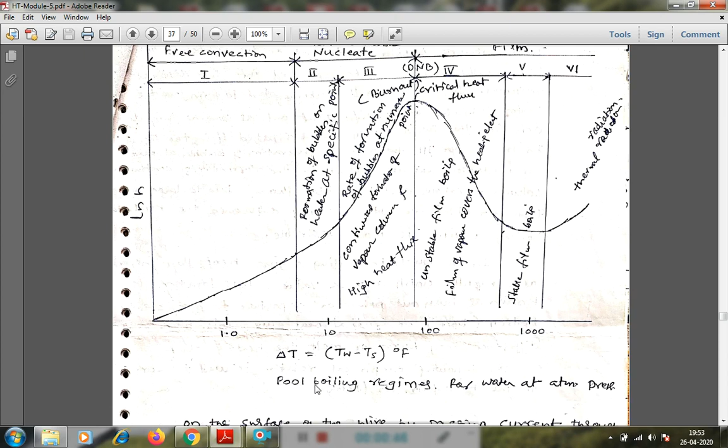These different stages of steam formation are called the regimes of pool boiling, or pool boiling regimes, under 1 atmospheric pressure. These regimes of pool boiling can be explained with a temperature difference versus heat transfer coefficient or heat flux curve.

Here the x-axis is the temperature difference between the wall and the steam, that is, the temperature of the steam formed and the wall temperature. Here the temperature difference is given in degree Fahrenheit, and here in degree Celsius.

Along the y-axis we have considered ln h, the logarithmic term of the heat transfer coefficient, and that is directly proportional to the heat flux also. This curve is drawn for an electrical heater coil immersed in liquid water.

Then continuous heating takes place, and heat is transferred from the coil to the water, and thereby the water temperature goes on increasing, and when it reaches the saturation temperature, vaporization takes place. We are going to discuss this vaporization in distinct zones here.

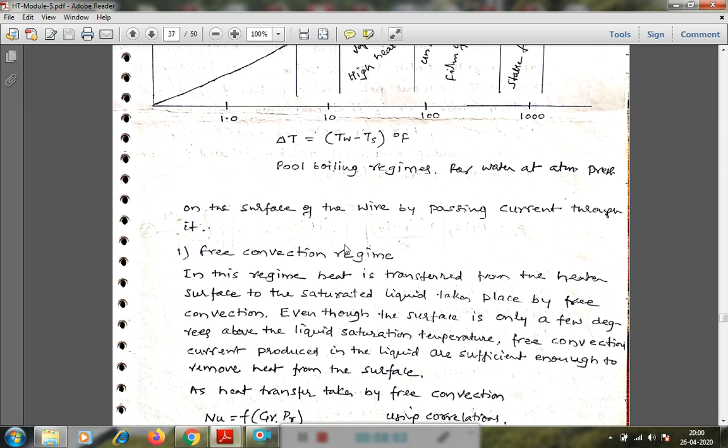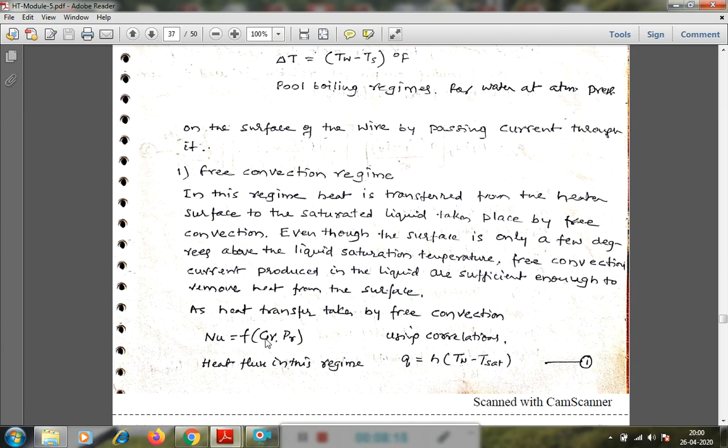Then in the free convection zone, what I discussed here, the heat transfer takes place by free convection. Here the heat flux can be given as h into (Tw minus T saturation). There we are going to use the Nusselt number as a function of the Grashof number and the Prandtl number. Then for nucleate boiling, we have already discussed the two stages, the second and third stage, and the DNB point and critical heat flux.

For this nucleate boiling, the heat flux is given by this equation: heat flux q is equal to mu L hfg [g (rho L minus rho V) / sigma] raised to 0.5, times [cpL delta T / (Csf hfg PrL raised to n)] cubed.

q is the heat flux, mu L is the viscosity, hfg is the latent heat of vaporization, g is the acceleration due to gravity, rho L is the density of the liquid, rho V is the density of the vapor, sigma is the surface tension of the liquid-vapor interface, and Csf depends upon the particular type of surface. I will show you this; it is available in the data handbook for the particular surface.

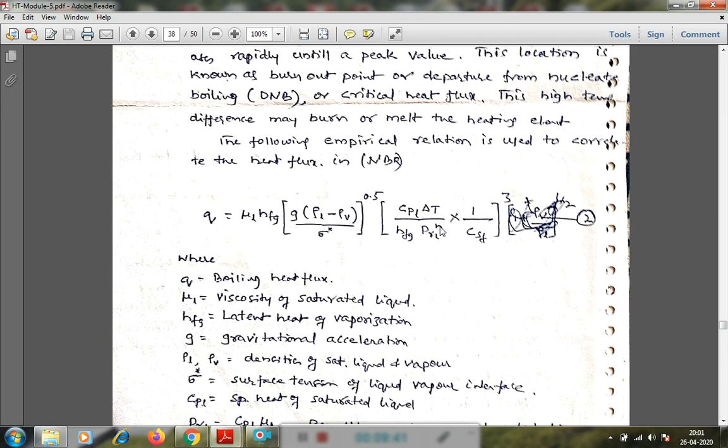CPL is the specific heat of the liquid, delta T is the temperature difference between the wall and its steam temperature, and HFG again is the latent heat of vaporization that we have taken, and PR is the Prandtl number of the liquid. This N is a constant: it is 1 for the water, 1.7 for all other liquids.

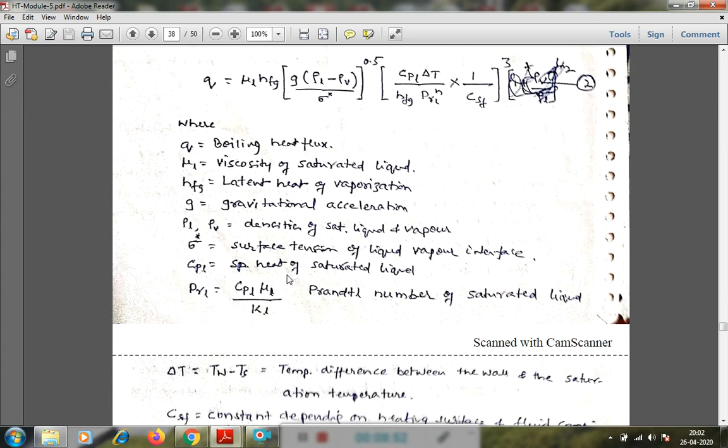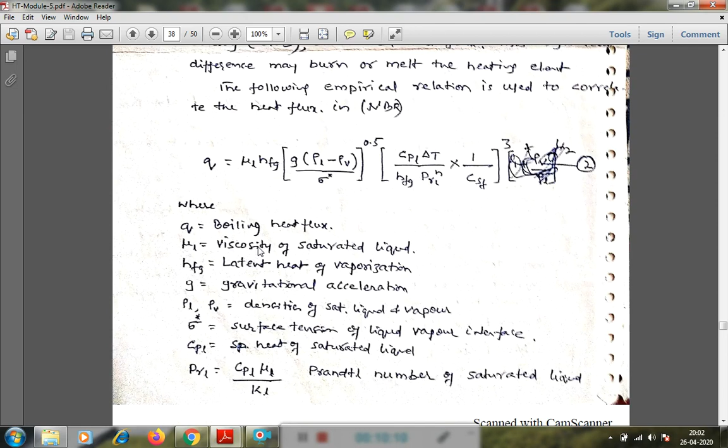And CSF is also a constant depending upon the heating surface. This is also available in the data handbook that we are going to use for determining the heat flux. Here the maximum heat flux equation is also available in the data handbook, and all other properties, that is mu L, HFG, rho L, rho V, CPL, we are going to get from the saturated liquid steam table in the data handbook.

The saturated water and steam table is available, and from that we are going to get mu L, rho L, HFG, rho V, CPL and PRL directly from the data handbook, for the film temperature TF, TW plus TS by 2, the average temperature of the wall and the steam. For that average temperature, all the other properties we are going to take.

For film boiling, the heat transfer coefficient uses this equation, but as this is not desirable, in many cases it will not be considered. In the radiation zone, radiation heat transfer takes place and also convection heat transfer takes place, and the radiation heat transfer is determined by this equation.

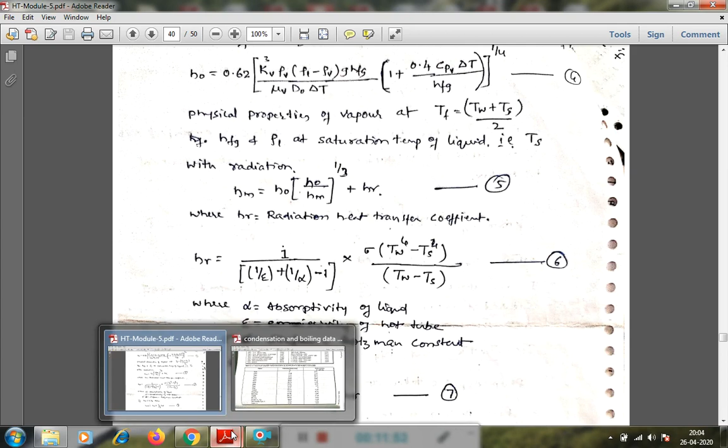We find the radiation heat transfer coefficient and the convection heat transfer coefficient, and from those we determine the mean heat transfer coefficient, which we use in the heat transfer equation for finding the heat transfer rate. And I'll show you the data handbook where we are going to use this.

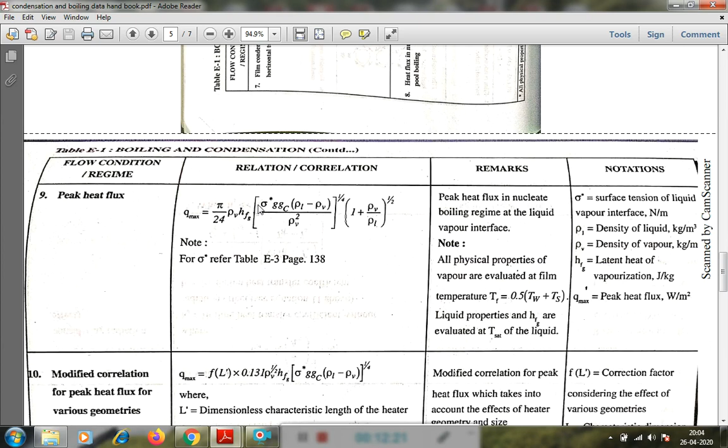Here this is the equation for heat flux in nucleate boiling. We use CPL delta T by HFG, PRL raised to N, CSF, Q by mu L HFG, GC into G star sigma star, G rho L minus rho V, and that is for the maximum heat transfer. That equation is simplified and used like this.

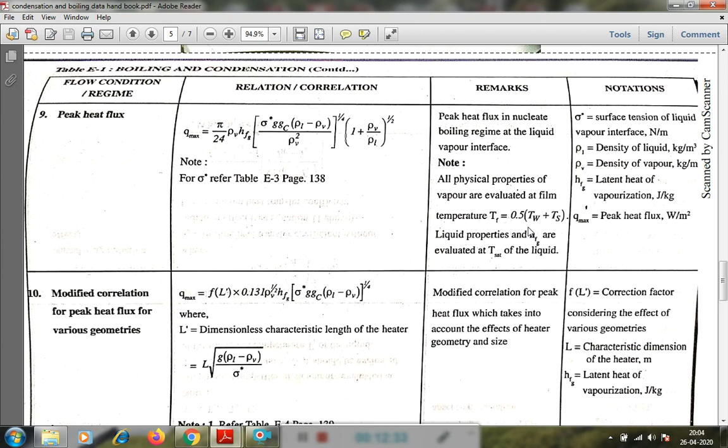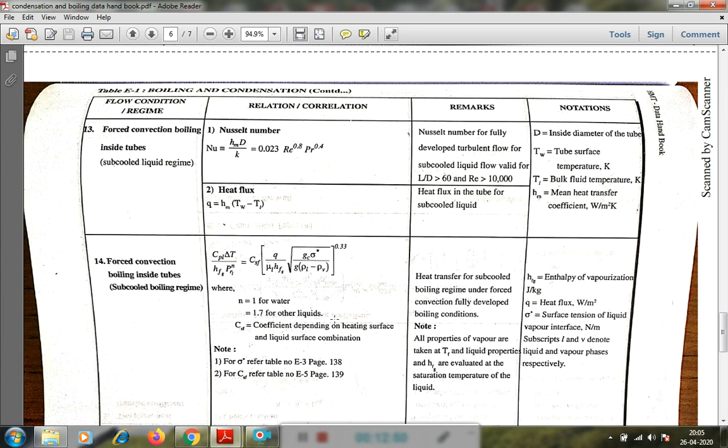The properties are at TF, 0.5 into TW plus TS, and this is 14 for forced convection, and N is 1 for water, 1.7 for other liquids. For the subcooled region we use this one. GC is also 1 for water, and CSF we determine depending upon the surface.

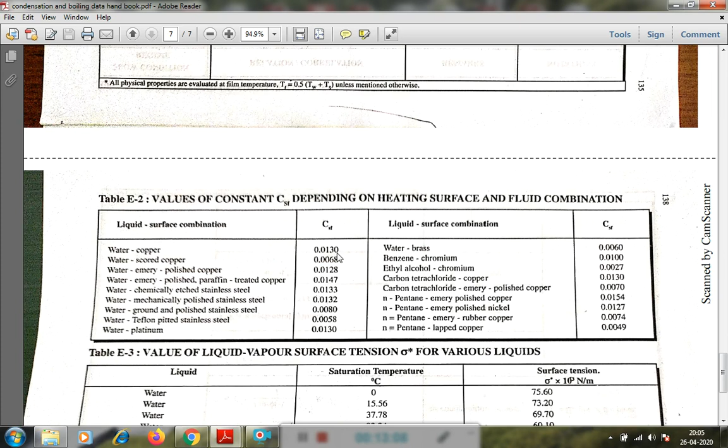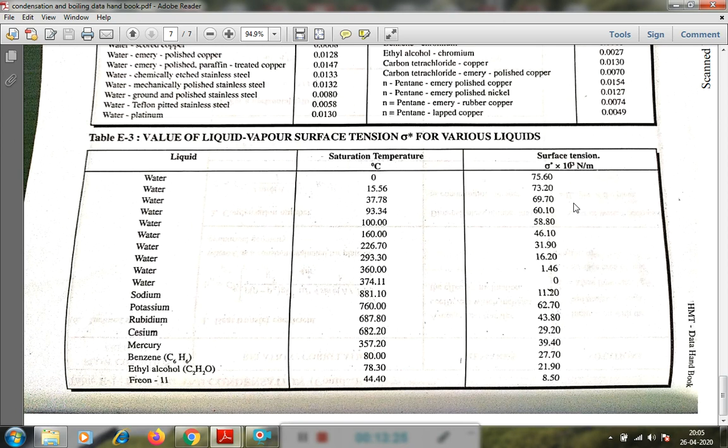Water copper surface, it is 0.013, water scored copper, like that. For the different surfaces we get CSF here, and the value of the surface tension we get here: for the different saturation temperatures, for water and other liquids, sigma star is given, sigma star into 10 to the 3.